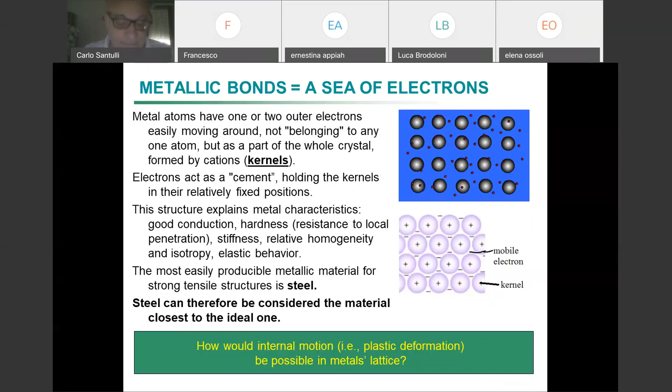We define the crystalline structure as a lattice, and that lattice, in general terms, is ordered. Then we need to explain, as I was saying, how in some cases, after the application of a certain force, so beyond the elastic limit, we have some plastic deformation. This can be explained by thinking of the fact that we have defects.

We have defects in our lattice, and the defects are important because they are able to explain the plasticity, and they are able to explain also the modification we can have to the structure of the metals, which allows them to be worked. Worked means that I can melt the metal and make objects, make structures out of it, or I may join the metals, because, for example, I can weld two pieces of metal together, and this is possible because there are some defects and therefore some modification from the order of the lattice.

Defects can be due to some simple events. One cation may be missing in the lattice. This is called a vacancy. Or I can have more cations than the ones included in the lattice, because you need to remember that alloys are not formed by one single metal, but they are formed by one metal and some other metals or some other ceramics, for example.

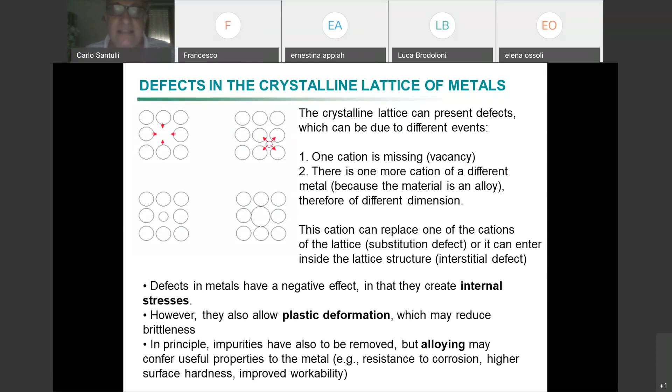I need to complicate a bit further that question in the sense that we could assume that a material without defect would be the perfect one. This is not the case. There are useful defects because, as I was saying, plastic deformation is also useful because it allows the workability of the material. But an idea which is important in material science, which has gone through for a number of decades, I would say, is this concept that something without defect is perfect.

So, of course, something without defects needs to be very small. And in fact, there has been quite a lot of research in trying to develop the so-called whiskers. Whiskers are hairs from cats in the normal language. And whiskers are also known in metals. They are elongated structures which basically have no defects. Whiskers have been developed in a number of metals, and they are very close to the ideal.

They have been developed in tin, that's the image I'm showing here to the left, zinc, cadmium, silver, and so on. But of course, they have no defects and they are brittle. You can imagine that they are brittle. They are elastic till the end of their force application, so till fracture, and they are brittle. So they break very quickly and abruptly without giving any indication.

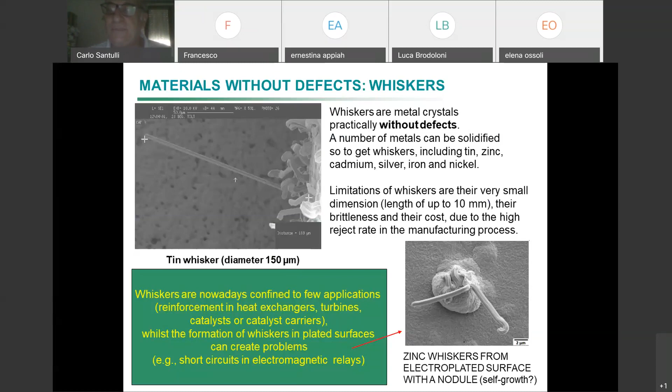They tend to self-grow over the structure by the application of a force, because there is always a force applied to the electroplating, because remember that the plating, the coverage, doesn't deform at the same speed and with the same characteristics as what is below, the main material, the bulk of the material. What happens is that in practice, some whiskers develop which represent a problem.

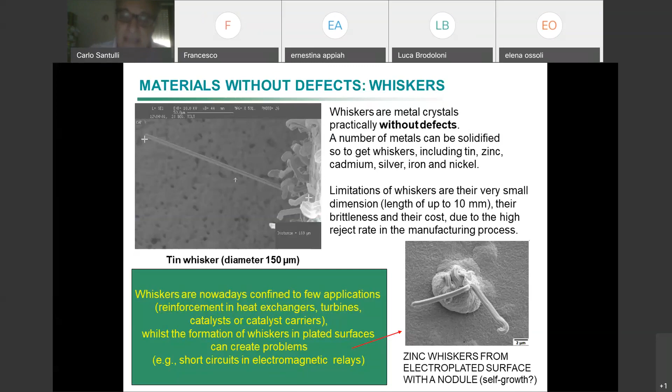Nature knows a lot about whiskers because whiskers are used in nature for basically your cat. If you have a cat, you may know that it uses whiskers to have a number of indications, which may not translate directly into numbers, but it feels vibration, displacement, and so on by the use of its whiskers.

You may see that as always in nature, the whiskers have obvious spiral structures, and also they tend not to have a constant section, and they tend to be made into progressing sections to the tip because they develop, they grow. This is the case for cats. This is the case for crickets.

Crickets have been studied a lot because they have these cerci, which are basically the antennae of the crickets, and cerci allow crickets to feel, to have indications, to know about vibrations, to know about displacements, to know about the presence of noxious or good chemicals, because every one of us and also animals are able to sense if we have conditions which are in the right pH range and in absence or in presence of some chemicals. So this is the case also for crickets, and there are a number of sensors.

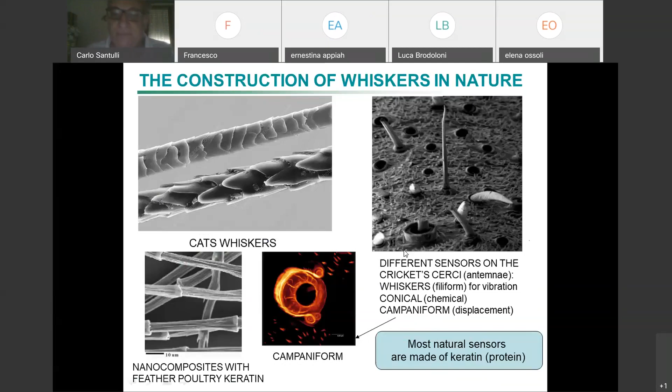Okay, so basically you may have seen that smaller defects are formed into the kernel, but also larger defects are formed because the crystal is made of nuclei. And basically, in practical terms, when you form a metal, this is molten into a mold, and in practice, what happens is that not the whole of the metal is solidified at the same moment, but it takes some time.

For plastics, it's worse because you don't have a precise temperature of solidification, as is the case also for melting. You have an interval. For metals, since they are crystals, we have a precise temperature of solidification. But on the other side, they don't solidify all at the same time. It takes some time, and some nuclei are formed with their own geometry, and therefore different nuclei may clash in the whole of the crystalline metal. And so you have metal grains, and you have boundaries between them.

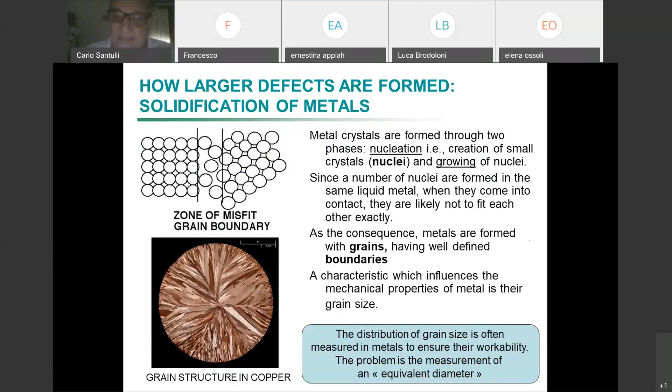Okay, carrying on. In some cases, you are also subject to the dimension of the mold. Of course, the mold is not infinite. You may consider it's like making a cake. You have a container in which you allow the cake to be prepared and put it in the oven, and then it develops in different ways depending on the distance of the wall of your container, your oven tray.

And so this has consequences. In the case of the cake, the consequence may be that if you are close to the wall of the limits, boundaries of your oven tray, it may be burned, for example, because it's close to the oven tray, which is in iron or in aluminum or whatever.

And in the case of metals, the same thing happens in a sense, because there are some structures which develop and the solidification starts from the sidewall, from the limits, from the boundaries of the mold, which means that in the end you have the question of the different nuclei starting growing, starting crystallizing, but you have also some different structures which are dendrites which tend to solidify in some places from the metal.

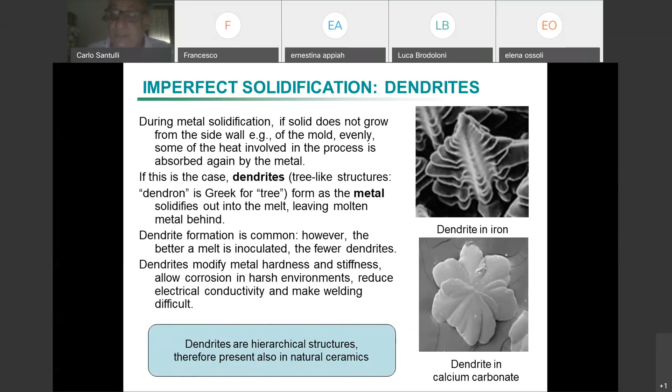I am saying all these things because as the course progresses, it's important that you make up your mind, that you get curious about some of the things I'm saying, and possibly you try to go deeper into that and to see if you may build a project or you may investigate literature further. But of course, we are just at the beginning, so there is time to do that.

Okay, so defects, big defects. Due to the fact that there are nuclei and there are grains and so on, nuclei form grains, grains collide between them, they clash. Therefore, there is a theory to try to understand, try to model how big defects move around. So basically, there are some defects which can be modelized into two main defects: edge defects and screw defects.

Again, edge defects, edge dislocations. Dislocation means that there is something out of place and therefore there is plastic deformation. Something out of place may indicate boundaries between grains or may just indicate there is a vacancy or there is one cation more in here, an interstitial cation and so on. Any of this creates a dislocation, so an unexpected movement, which might be an edge dislocation or a screw dislocation.

So this unexpected movement may go in plane or may go out of plane. In plane means that you move basically by a shear stress. There is always a shear stress, I mean that it's perpendicular to the tensile stress. So I have a shear stress, I would say it's a shear tensile in a sense. And there is a slipping plane, so there is a plane parallel to which you have a kind of sliding.

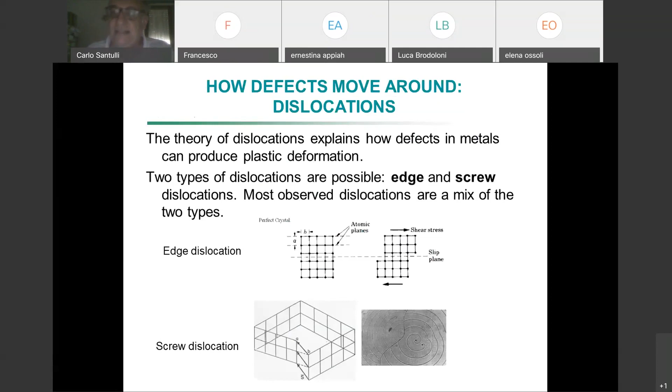Or you have a screw dislocation, and therefore you may have a kind of torsion, out of plane. You may have a movement. These are ideas because, of course, the real movement occurs partially in plane, partially out of plane. That's the common way of working. But this is useful as a model because it gives the idea of how plastic deformation occurs, and also it gives an idea of how the real deformation takes place.

You may have an edge dislocation, with an extra sheet of atoms, you may model with an extra sheet of atoms of cations in reality within the lattice, or you may have a helix-like surface. So the plastic deformation may go either in plane or out of plane. That's the substance of the thing. And you may represent each deformation, which is a combination of in-plane or out-of-plane, by a Burgers vector, which gives you an idea of how much of the component is in plane and how much is out of plane.

This is useful not only in mechanical terms, but also in macro mechanical terms, because in the end you find out that you have a breaking surface, a displacement surface which ends up with a fracture surface. So we understood that plastic deformation sooner or later leads to failure. You may have little or no plastic deformation at all, and therefore you have a fracture surface which is abrupt, clear, in some cases very smooth, because the failure was abrupt.

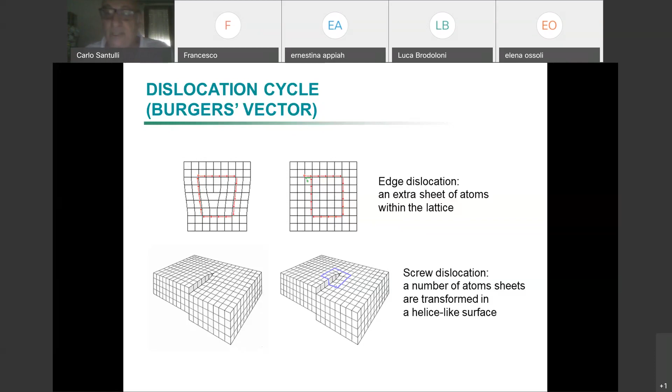Well before that load drop, you need to stop using the material. But predicting when the load is going to drop is important anyway to use the materials. Without going into many details, you need also to consider that there are different shapes, different cells of the crystals. The atoms can be disposed with less dense or more dense packing. If they are less heavily packed, there is more space for other atoms to enter the crystal. In other cases, they are so heavily packed that there is not much space to include other atoms.

This is important for alloying, because alloying requires mixing with other atoms, of other metals, of other ceramics. You may have carbon, but also aluminium, for example aluminum oxide, silicon oxide, and so on. The original iron was full also of silica, because it was extracted from the rocks, and it was difficult to get rid of silica. The temperatures needed were very high. So lots of iron used in the 18th and 19th century had silica, which reduced tensile strength, but gave higher hardness, so it influenced the use you can make of iron.

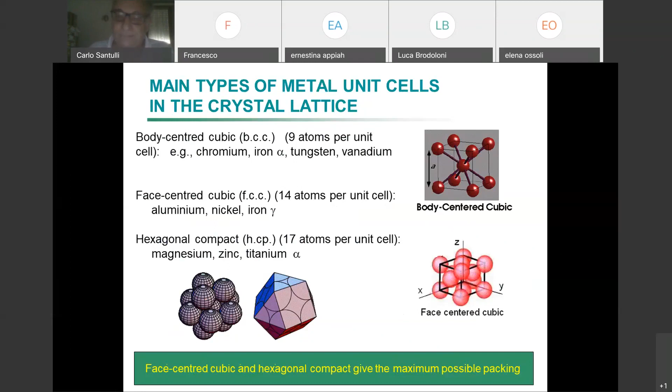Okay, having said that, we were talking about hardness. This is a kind of a hardness test. With respect to tensile tests, you can see that hardness tests give very basic information because we compare. Technological test means that we compare with something. We assume that something is 100 and we compare the hardness of our metal. It's a bit more complicated than this because we have hardness scales for every material.

You may have Shore hardness for plastic, Knoop hardness for ceramics. You may have Brinell. Brinell is the main one for metals, and you have Vickers as well. This image in reality shows a Vickers test because you have a diamond tip which indents the material and produces a trace, an indentation of some dimension, which is measured, and it gives you an idea. The larger it is, of course, the softer the material is. If it produces a small indentation, the material is harder. This is obvious.

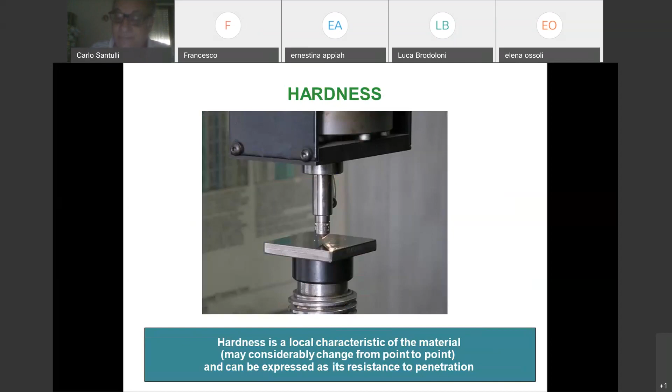Having said that, there is a correlation between hardness and also the ultimate tensile stress, so the tensile stress at which the material breaks. Basically, there is this formula. Don't be deceived, I wouldn't use many formulas in my explanations because it's more important to focus on the problems, which in material science are countless, than to give formulas, because you can see that formula, for example,

it works very well because it gives you an idea: you apply a force, you press a force for 10 to 15 seconds, the standard says, against the metal. Then there are a number of requirements, because the metal needs to be completely flat, which is easy for many metals. For example, with stainless steel it is easy to have a flat surface.

Other kinds of hardness tests are more difficult because, for example, with plastics, having a completely flat surface sometimes is not that easy. Flat and quite thick, because there is also a limit, because you cannot make a Brinell test of a half a millimeter sheet, because you will get the material penetrated by the tip, and this is not what you want. You want to create an indentation, but not to penetrate it. An indentation that keeps the material sort of flat. So a small indentation in comparison with the thickness of the material. So you can consider the material as a whole and say, well, it is flat, although it has an indentation.

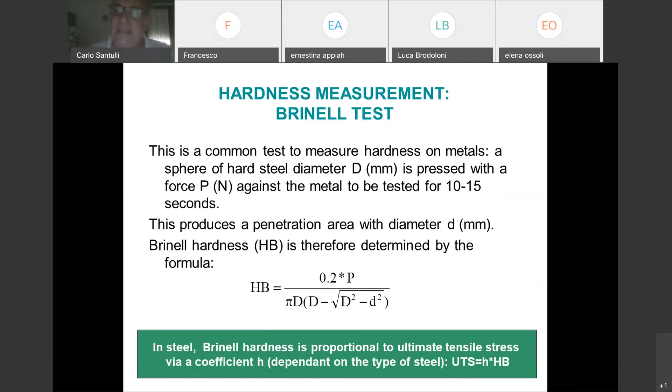Anyway, carrying on with this kind of evaluation, you may remember our stress-strain curve. Initially it was a line, then it becomes a curve when you start with necking, with plastic deformation, etc. This is very simple, very brutal, I would say. And you have basically a hard steel. You can see that the hard steel shows less plastic deformation, a higher tensile stress in most cases. Soft steel, this is very general, because then we can say how hard is hard and how soft is soft.

But if you compare two types of steel, one which is hardened and the other one which is softer, you may see that the Young's modulus is about the same, so the slope is about the same. Young's modulus doesn't change much in steel. But what changes is that hard steel has just a little bit of plastic deformation and then it breaks. We could even think of neglecting the plastic deformation. Of course, it's brittle. Hard steel is much more brittle than soft steel.

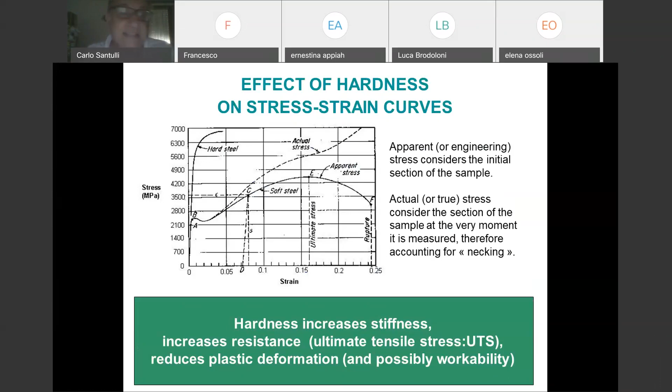The other question is that in some cases you will see some materials, well, with steel everything seems ideal and you may be happy about that. With other materials, the problem is that you don't have any part of the stress-strain curve which is really linear. You have some behavior which is a bit fuzzy. Plastic deformation starts at the very beginning with plastics. Plastics are called like that because plastic deformation starts at the very beginning.

That's why we are hardly doing screws, and especially springs, with plastic. We do some springs with nylon, because with nylon, for small forces, we have a sort of elastic behavior. But doing a spring with plastic means that the spring will undergo plastic deformation very easily with very small forces. You will never see, I hope to be wrong, a polyethylene spring, because of course it would cost 1/10 of a steel spring, but you have no real elastic behavior.